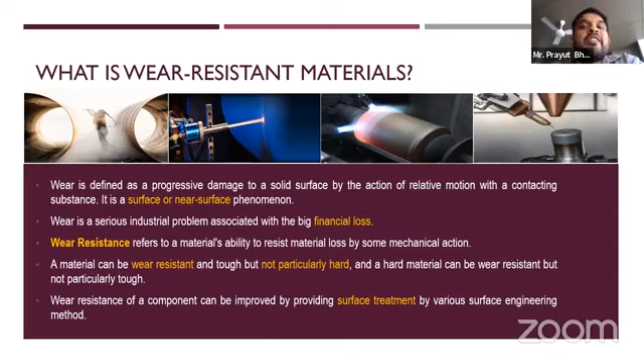So the wear resistance of a component can be improved by providing surface treatment through various surface engineering methods. Every material has its own property - it cannot necessarily be made wear resistant, but we need certain flexibility, certain requirements where we are required to use a particular material. So what we can do to improve the wear resistance while using the same material - that's what surface treatment or surface engineering method means.

Taking on surface treatment, there are basically three processes. The first process is that whatever the parent material is, we call it the substrate, on top of that we apply a coating which is a higher wear resistant material. Because this wear resistant material has a certain special property, it is a costly material. So you cannot directly use the entire component as wear resistant material. So what people do is take the basic material where wear is prone to occur, where there is a wear prone zone with maximum wear out, and apply a coating of highly wear resistive material on that surface.

So basically the first point, as it says, processes which apply a new material, a coating to the surface, leading to the formation of a different phase with a distinct boundary between itself and the substrate. Not to get confused with too many jargons, but basically on top of the substrate or basic parent material, I apply another layer of coating whose property is wear resistant. That's what the first process is about.

The second process is to modify the existing surface by inducing a change in composition of the surface engineered layer. This is not the same as the first one, but it's also changing the chemical composition on top, modifying the upper composition. The first point is about applying a different layer to the basic surface, and the second point is changing the modification within the parent material by introducing some new elements so that the composition is changed. It's not a different layer of a different material, but keeping the basic material the same, just slightly changing the composition so it can attain this property. We'll come to this point again about both points.

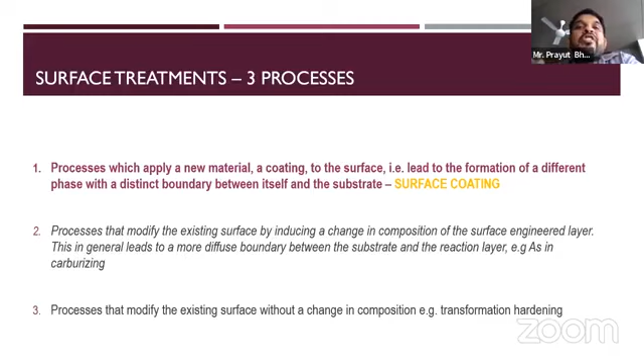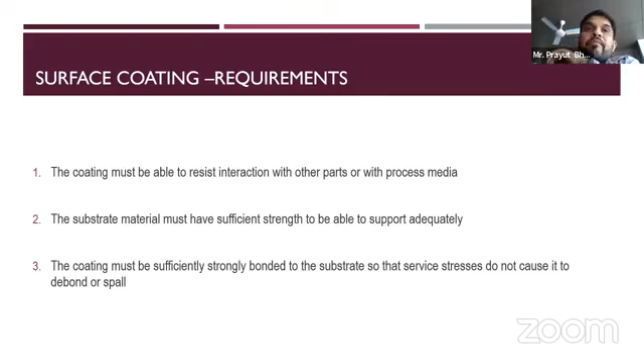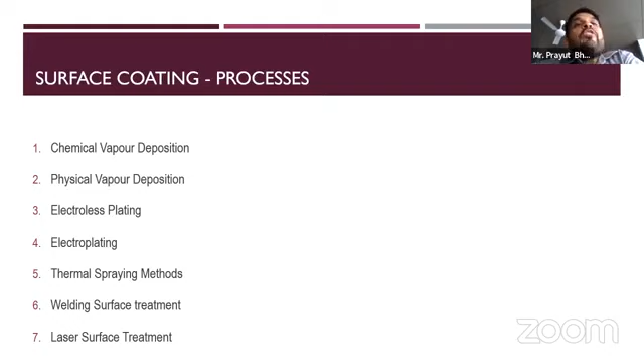There are basically 7 different processes. Even I didn't know this much before, but while working on this presentation, I came to know there are 7 different surface coating methods which we can use. In our company, Mangalam Stilcast, we use a couple of these methods, which we'll cover in the presentation. But to give you a brief idea of which methods can be used, I will explain one by one. First is the chemical vapor deposition method.

This is basically deposition of a solid coating on a heated surface resulting from a chemical reaction at the surface involving surrounding vapor or gases. Basically what happens is there is a chamber, there is a parent material, the parent material is heated up, and then there is the material of interest, the surface that has to be coated. It comes in a certain form, and that form is exposed to high temperature, and a reaction takes place with the help of reactant gases. When the coating material and the gas combine, there is elimination of waste gas, and the metal which is required to be deposited starts settling on the parent material.

In this example, let me use the pen. This is the reaction chamber, and this is the material of our interest. Suppose M is some element that we want deposited on the parent material. We take this composition in whichever readily available form it comes in. We take this composition and react it. For example, here we have reacted it with hydrogen.

Now this material is present in a layer, but it's not sticking to the surface. Once it reacts with the hydrogen, there is formation of 2HCl, again in the form of gas, which escapes out. And this metal gets deposited over here - it settles by its own weight onto the parent material. Again, in this process, the parent material has to be heated to quite a high temperature, because the reaction takes place under high temperature conditions.

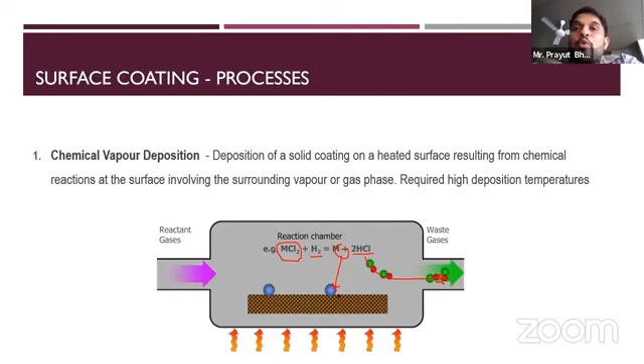So the surface coating has to be selected based on this - that it should react with this element, deposit properly, and react only at high temperature. It should not directly react at low temperature or ambient temperature. Otherwise, it might react with something else during production purposes and lose its effectiveness. So this is chemical vapor deposition.

Similarly, there is physical vapor deposition. In this case, what happens is there is a source - this is the source of interest which we need to deposit. So first we vaporize it, with vaporization, and there is a gas inlet. This is a vacuum chamber. There is a power supply for the evaporation sources.

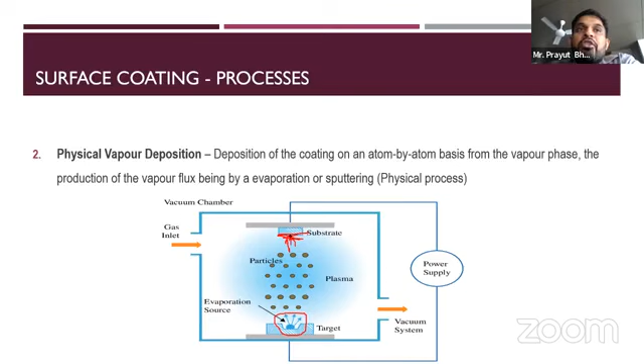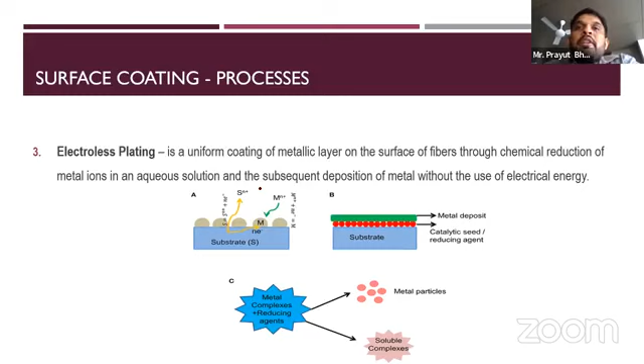This is a normal phenomena we see in day-to-day life, many times knowingly or unknowingly. The fourth one is electroplating, again a very common method. There's an anode and cathode, current passes and the metal ion starts shifting and deposits onto a particular surface. So electroless plating and electroplating are very trivial methods.

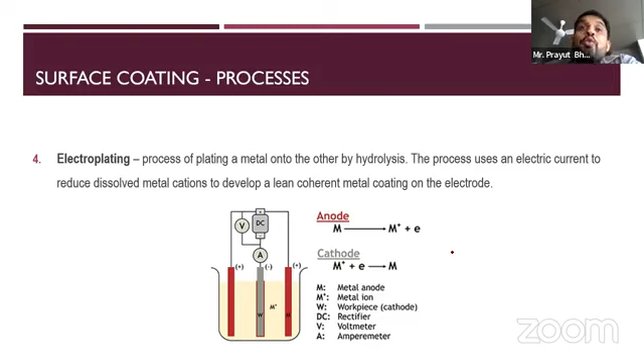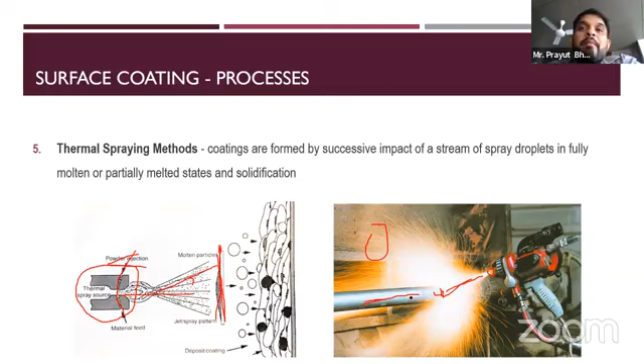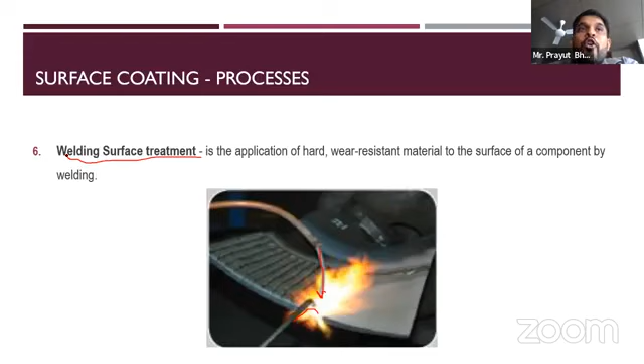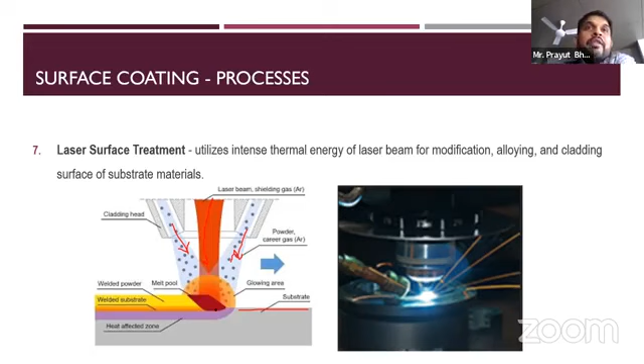So we talked about basically 7 surface coating methods by which this can be done, and out of which we are already using two: thermal spraying method and welding surface treatment. And the third one also I have a basic know-how of, but we are not using it in-house, we are getting it outsourced.

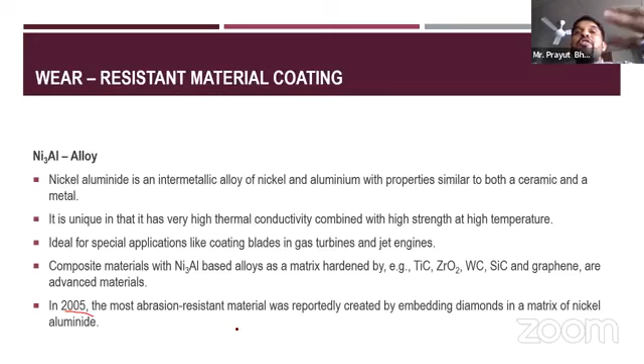But again, from the application point of view, cost point of view, where it can be applied, where it can be used - it's very important. And it's not that just because it's a hard material, you can use it anywhere you want. It has to be respected with respect to the three initial conditions we discussed earlier, and based on that, they take it forward.

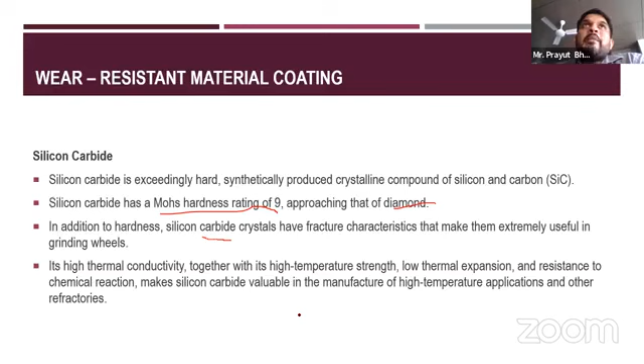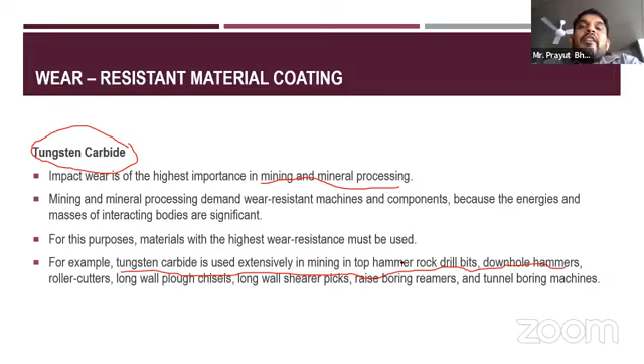It's a low cost compared to silicon carbide - actually silicon carbide is a lower cost, tungsten carbide is a bit higher cost. But again, compared with the other alloys that we discussed, this is a low cost, and the application is also very easy. So it's popularly used.

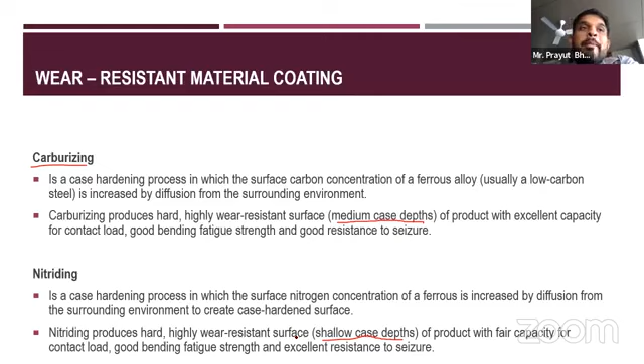Similar to this, there is another one: boronizing. Again, it is similar to nitro carburizing. In this one, a boron atom is used, but in this case the temperature is too high - about 1000 degrees Celsius - and we have to use it for really long hours. But again, very good resistance to wear, and it gives a very good property.

Plus the flexibility of boronizing - it can be used for steel, cast iron, ceramic materials also, and non-ferrous alloys also. In the previous ones that we saw, it's mainly for ferrous material.

And then this is the case hardened steel, which reflects the third type of process we talked about in the initial slides, in which we just modify - we don't do anything new, no new addition to the parent material, but we just modify the structure of the material so that it resists wear.

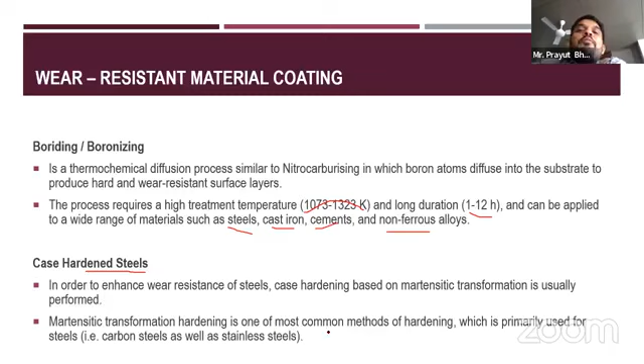But we can do it to an extent that it can permit. So basically, in this case, enhanced wear resistance of steel, case hardening based on martensitic transformation is performed. Martensitic hardening is one of the most common methods of hardening, primarily used for steel. The microstructure in the steels is changed to a martensitic structure, which gives better hardness and better wear resistance. So this is case hardened steel. Again, very low cost, very effective, but not as good as the previous process we have seen.

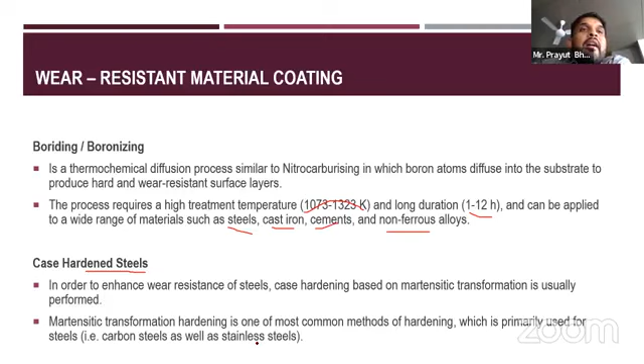And this one is the final one. It's titanium carbide and titanium nitride hardening. Titanium in itself is an extremely hard material, and titanium nitride, the nitrogen coating, is also very hard. So titanium nitride, when combined together, forms a ceramic kind of material that is very hard. This coating is done through physical vapor deposition, the PVD process that we studied earlier.

So through this process it is done, and it is basically a costly process. It is used for increasing tool hardness. Whatever hardness and properties the raw tool has, vapor deposition is done on top of that, depositing titanium nitride. Because of this highly ceramic material, wear resistance is increased and cutting application is also increased, because the cutting tendency of this material is very high. So it is majorly used in tools.

The Vickers hardness for this is mentioned as about 2100, because it's a very hard material, 1800 to 2100. You cannot measure it in HRC, you cannot measure it with the BHN tool, so it's very hard. Again, we just do the coating of it because it's a costly process, and it looks like a metallic gold color. So when you see a certain tool and it's this color, that might be a possibility it has been coated with titanium nitride.

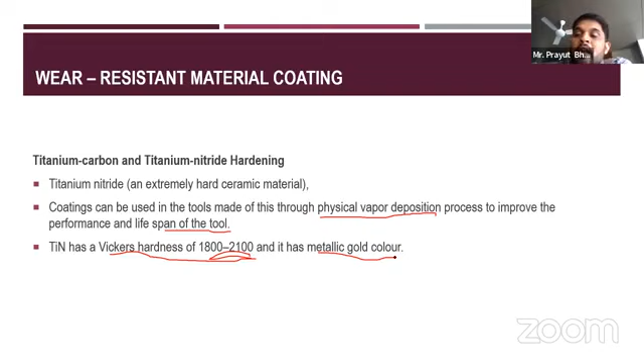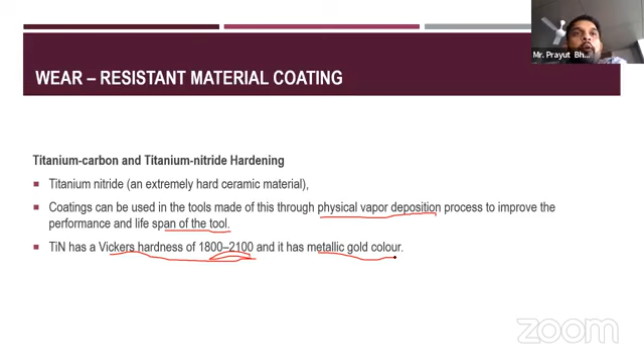So these were the basic materials, the ongoing trends which are popularly and widely being used as wear resist materials. We are playing a lot with tungsten carbide. Then there is chromium carbide also, but again it does not have that kind of wear resistance as tungsten carbide has, so tungsten carbide is very popularly used for this application.

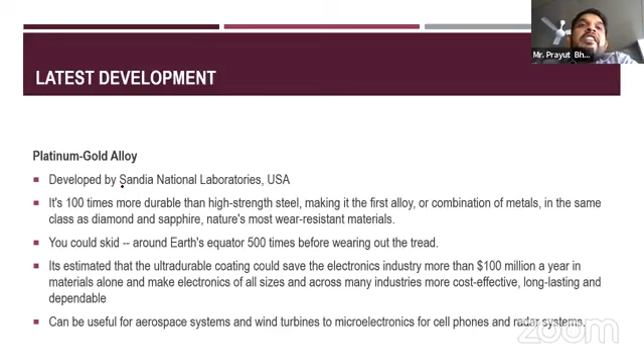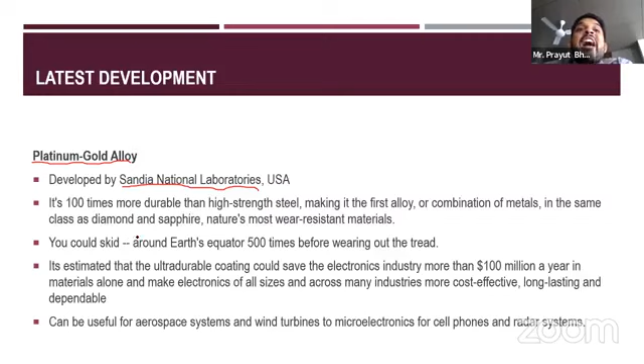Recently, when I was searching for this, I encountered a certain development by the Sandia National Laboratory, located in the USA. Apparently they developed a platinum gold alloy. This is already a very popular alloy as such, but they modified certain characteristics, the matrix of it, in such a way that it's 100 times more durable than high strength steel. It's making it the first alloy or combination of metal in the same class as diamond and sapphire, which are nature's most wear resist materials.

They have achieved these properties of diamond and sapphire with the platinum gold alloy. They haven't mentioned too much detail about this, and I think they are still in the process of figuring out how to make it for coating purposes. But as an example, if you have a car with metal tires, and you do the coating of this platinum gold alloy on those tires, it will not drive normally, you will be skidding. So you can skid around Earth's equator 500 times before the wearing out of the tread.

You know tires have treads. So before this will start to wear out, you will already be covering like 500 times around the Earth. And if it gets successful, they have estimated that with this coating they can save the electronics industries more than about $100 million a year in materials alone. It can be used across many industries for a cost-effective, long-lasting and dependable solution.

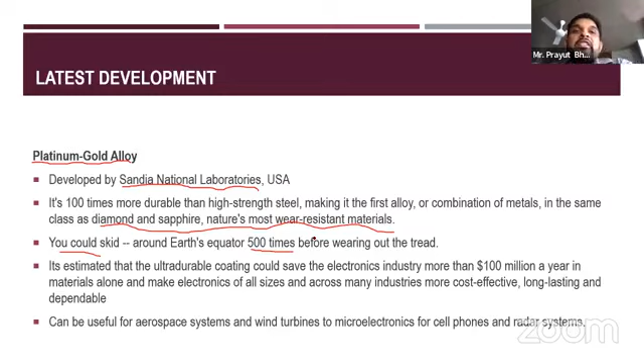Right now they mention applications like aerospace systems and wind turbines, to microelectronics for cell phones and radar. So in your cell phones and radar systems also, you will have this material acting as a wear resist material. So so many things are coming out. This is, as I mentioned, a very remarkable achievement, because you are reaching nature's most wear-resistant material equivalent. So yeah, that's the latest development which I have come across.

It directly affects production, because you have to change the part and it cannot work with full efficiency. And then there are indirect losses because it's connected to some other part, and now because that part is not performing efficiently, the other part is getting damaged since it's doing work it wasn't meant to do. So there are direct and indirect losses due to it.

So it is a very hot topic of interest and research for industries and academics. If any of you are thinking about what topic to choose, this is one of the very interesting topics.

I think it's an evergreen topic, because you can keep exploring it again and again. If today its life is 10 days, I will want to research and try to increase the life to 15 days. Once you achieve 15 days, someone will say, not 15, I want to achieve a life of 20 days. So this is a never ending process, and there will be more and more demand. It's basically human nature.